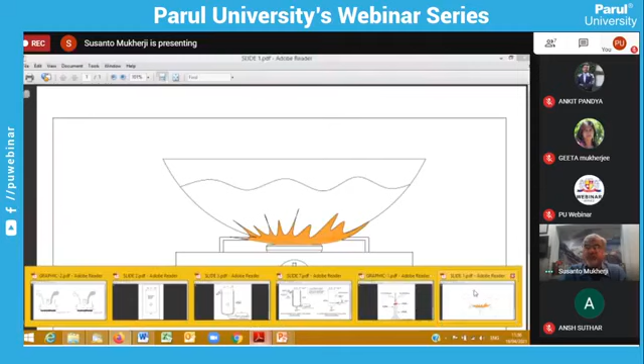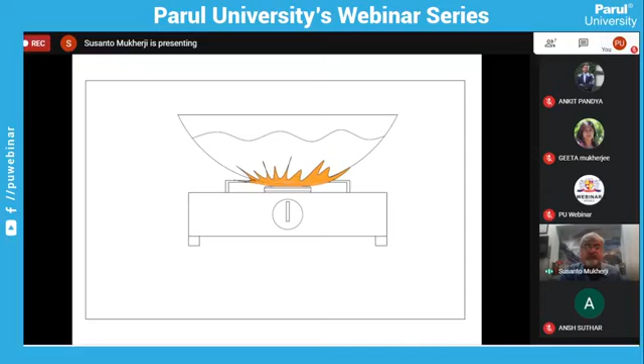Suppose we would like to make sugar syrup at home, chasni as you call it in Gujarati. What do we do? We actually take a pan, put sugar and water inside, put it onto the gas stove and heat it till we get the required consistency, right? Now in industries like the sugar industry, Baroda Dairy, the food industry, which is also a part of the process industry, this same heating would be required, and it would be required to be done 1,000 times more, or maybe more than 1,000 times more. So now suppose we try to heat this in the same way as we do it at home.

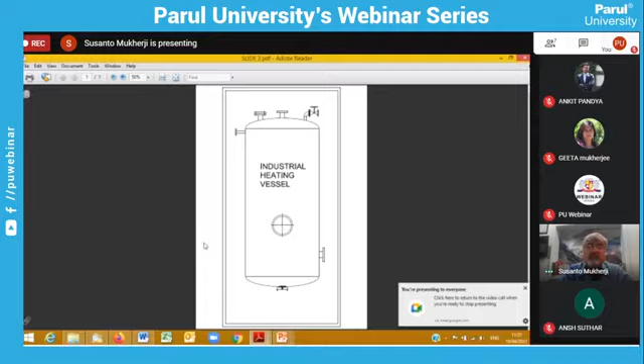By putting a gas stove, see what would it look like. This is the kind of size of the vessel that is used for heating the process fluid inside. And suppose you want to heat it with a gas stove as seen here, this would be the situation, which is actually just not possible, right?

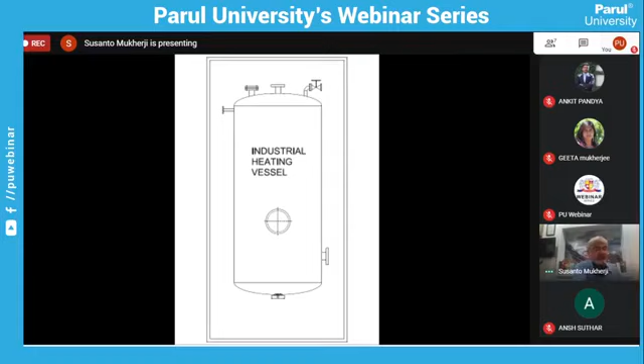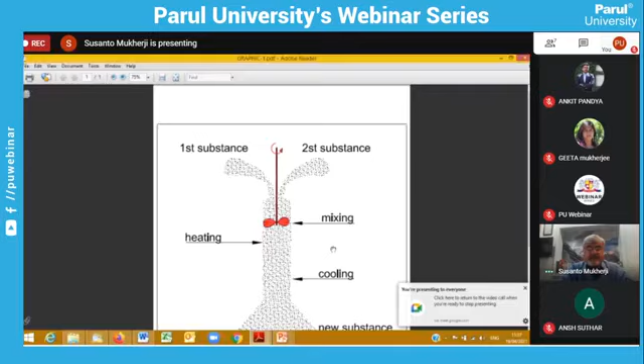So we will try to understand how the heating is done in the industry. Before that, I would like to discuss with you this term we are using, process industry. So what is a process industry? To understand that, let us see this figure.

A process industry in general is defined as an industry where two or more different substances are mixed together, and then heat is provided, that is heating is done, or cooling is done if the process is exothermic, and what we get is a completely new substance, a third substance comes out. Now the sequence of mixing, the time of mixing, the heating time, the cooling time, the sequence of heating and cooling might be different based on the substance that we require. So a process in the process industry would involve mixing two substances, making it go through a process of heating, cooling, etc., and getting a third substance.

As we discussed about the sugar syrup, it is also a process in the process industry. Sugar and water is mixed, put inside a container, and it is heated to get the required consistency.

Similarly, if we look at another process we might have learned in chemistry: calcium carbonate plus hydrochloric acid gives calcium chloride plus water plus CO2. The equation would be as simple as CaCO3 plus 2HCl equals CaCl2 plus H2O plus CO2. Let's not get into those complications.

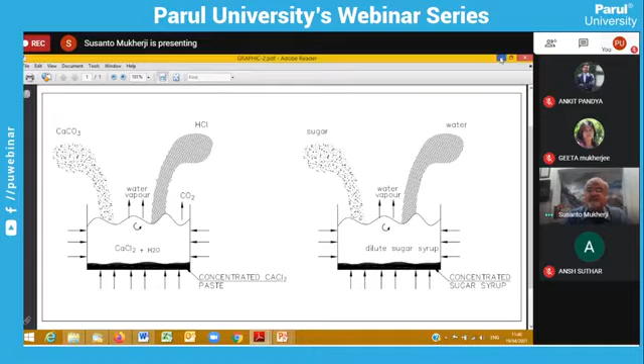Both these examples, the sugar syrup as well as mixing of limestone with hydrochloric acid, are examples of heating used in the process industry. Now, how is this heating done in the process industry? As we saw, we cannot do it by putting a gas stove under a vessel because the vessels are very big. So how do we do it in a process industry?

This is the kind of vessel that is used. Now, what we are trying to understand, as I said in the beginning, is the indirect steam heating. We will do the indirect steam heating first, and then we will go to the direct steam heating.

A jacket has about, say, 50 mm or 100 mm gap between the main vessel wall and the jacket wall. Steam is provided into this jacket, and this steam gives its heat from the jacket to the inside, and inside the vessel there is this fluid.

So if you want to make sugar syrup, Sugam Dairy wants to make sugar syrup, they will put sugar and water inside here. They will supply heat through the steam, through the jacketed vessel, and this will start boiling, and therefore you will get a concentrated sugar syrup. The same happens with limestone powder and hydrochloric acid, and heat is provided by steam through this jacket.

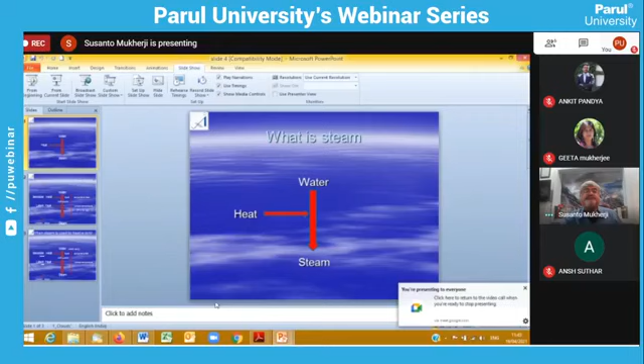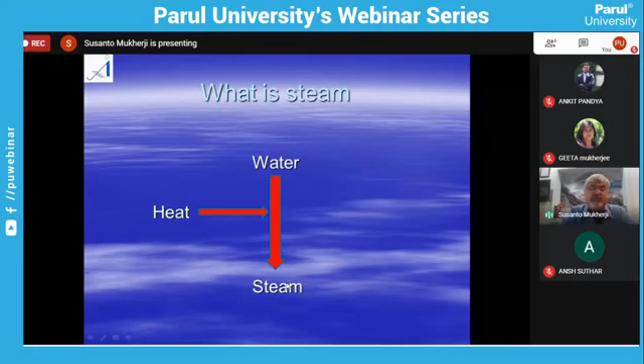For this, we'll try to understand the characteristics of water. Now, what is steam? Steam is nothing but the vapor stage or the gaseous stage of water. Now, if you have water and you supply heat to water, what you get is steam, in very simple words. Now let us understand this in a little more detail.

This heat that is added to water in the liquid state is called the sensible heat. It is named the sensible heat for the purpose of understanding. After this sensible heat keeps continuing to heat the water, temperature rises and reaches the boiling point, which is also called the saturation point. You continue to supply heat, and what happens is the temperature remains constant, but heat keeps getting added to water, and the water starts changing its state.

It starts changing its state from water to steam. This heat that is supplied at constant temperature to water to change its state is called the latent heat. I'm quite sure you all have studied all this. The latent heat is used for energizing the molecules to break it apart and change the state of water to steam. This happens at constant temperature.

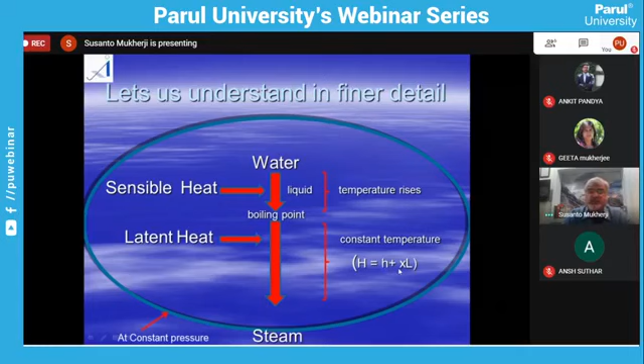Now what happens if we reverse the process? Once the steam is taken and made to get in contact with a cooler surface, what happens? Immediately the steam will start giving away its latent heat first. Once it reaches the saturation point, that is, all the latent heat is given away, it will turn into water, and there still will be sensible heat in the water, and the sensible heat will also be given away.

But what we need to understand here is latent heat is given away very easily by steam. That is why you see the words udaar and kanjoos here. What it means is latent heat is very easily given away, very fast given away, that is, it is given away at a very fast rate.

And sensible heat is difficult to give away. So once you have hot water, you will have a very slow rate of heat transfer. So whatever heat is required for heating the cold fluid will be done at a lower rate if you have hot water and you are transferring sensible heat. As long as steam is there and giving away its latent heat, the latent heat is given away fast, and therefore a faster rate of heating takes place.

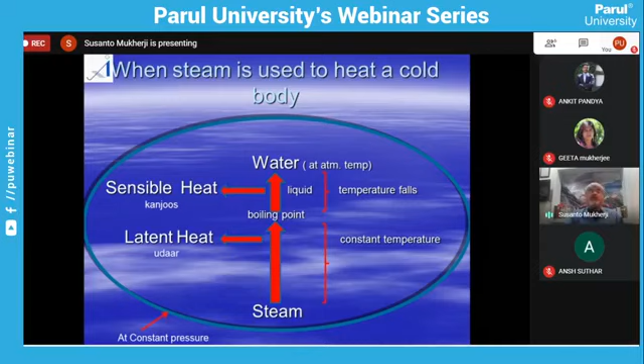Therefore, if you go back to the fundamental of the jacketed vessel, you will now realize that steam is used for heating because there is latent heat inside steam, and latent heat is given away fast. Then the water is removed because sensible heat gives away slowly.

Now most of the industries work on the logic of rate of production. Rate of production would mean how fast production can take place. Therefore, every industry is more or less interested in having the latent heat so that heating takes place fast, and removing the water. The steam forms water after the latent heat is given away, and removing that water as soon as possible because sensible heat takes time to get transferred.

Now let us get back to the slide of the jacketed vessel again to understand it better. As we saw before, this is the jacketed vessel.

Therefore, indirect heating in industry takes place in a way that steam is supplied into the jacket. There is the process fluid inside. This is the cold fluid as we talked, and this is the hot fluid. So as soon as steam comes in contact with this surface, which is cold due to the cold fluid inside, it starts giving away its latent heat. This is called the jacket area. So from the jacket area, the steam starts giving away its latent heat.

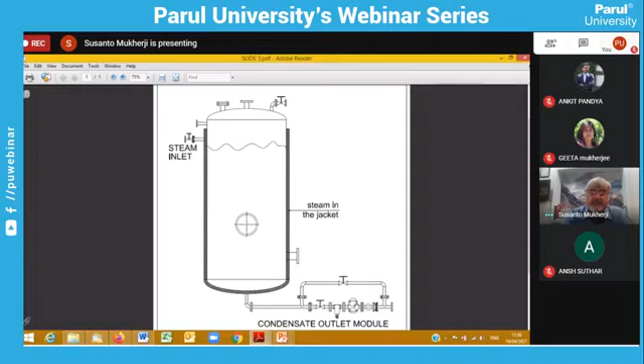This is called the steam trap. Now a steam trap is an equipment which allows water to flow out but does not allow steam to go out. How this works is a different subject altogether; if the opportunity arises, we'll discuss it sometime. But at this juncture, let us understand that a steam trap is a kind of equipment which will stop steam from going out, so that all the steam, until and unless it has given away its latent heat totally to the fluid for heating it, is not allowed to go out, but it will allow water to go out. So as soon as water is formed inside, it will get removed through this steam trap module.

Everything else you see here, like this strainer, these valves, this double window sight glass, are all to complement the steam trap. The strainer ensures the steam trap doesn't get choked, and the double window sight glass lets you see whether water is being removed or whether there is a leak in the steam trap and you are losing steam, etc.

So this is how indirect heating takes place in the process industry. Indirect heating means the steam does not come in direct contact with the process fluid, so it's indirect. The steam gives away its latent heat, and as soon as the water with the sensible heat is formed, it is removed.

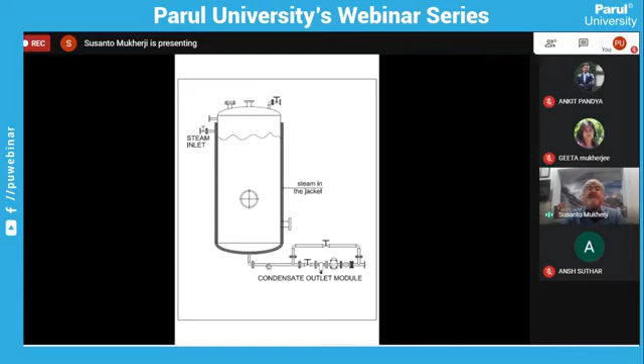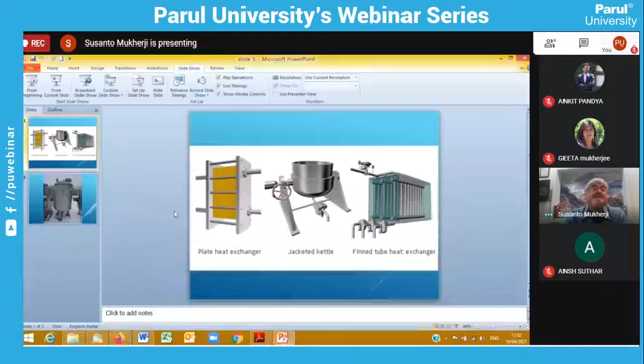Let us see a few more equipments used for this kind of indirect heating. You have, say, plate heat exchangers here. Plate heat exchangers would mean different plates put together with a slight gap between the two, then bundled up using these end plates. Steam passes through one path and the process fluid passes through the other gap.

So side by side you have steam in one plate and the process fluid in the next, steam and process fluid, and this is how the process fluid is heated using steam without the steam getting in touch with the process fluid. These are plate heat exchangers, and the main advantage is that you have a bigger area of heat transfer than the jacketed vessel. There are many plates, so all these areas together give you a bigger area where steam can keep giving away its heat.

Similarly, you have kettles like this. The sugar syrup in the food industries is made in these kinds of kettles. Process fluid is poured inside, steam is used in the jacket, and this is the steam trap. Once the sugar syrup is achieved, you just use this handle to convert or tilt it and remove the sugar syrup.

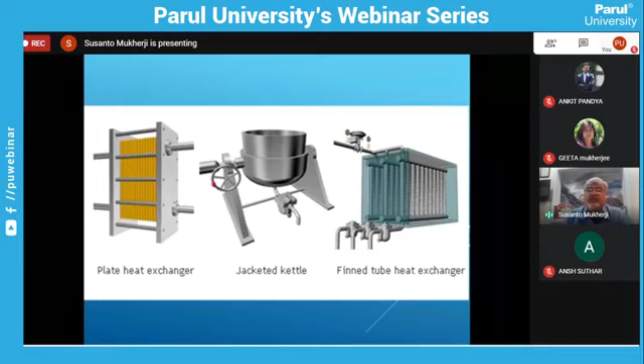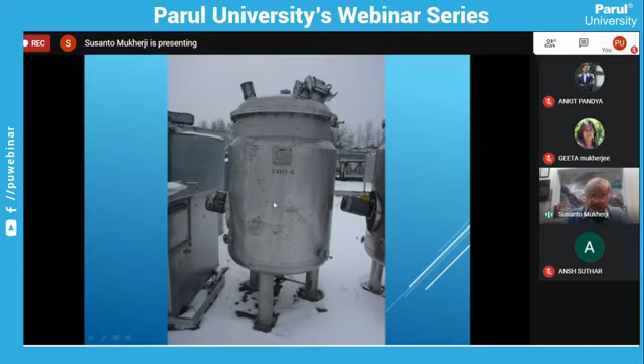You have fin tube heat exchangers. Fin tube heat exchangers are tubes put inside which have fins to increase the area of heat transfer. Steam passes through the fin tubes and the process fluid passes from the side. All these are vessels, like this jacketed vessel, the drawing of which we saw. This is the jacket, and this is the main vessel where the fluid is poured in. All these vessels are used for indirect steam heating because the steam does not get in touch with the process fluid.

Now in indirect steam heating, we need to understand one fact: once the condensate is formed after steam gives away its latent heat, this condensate needs to be removed, and is either wasted along with the sensible heat, or arrangements have to be made for returning this hot condensate back to the boiler feed water tank so you can recover the sensible heat in the water and not waste money, because heat is equivalent to money.

This is how basically indirect heating takes place in an industry.

Okay, now that we have understood what is indirect heating, let us now approach how direct heating takes place in the industry. At the end of the session, we will have a comparison of direct steam heating and indirect steam heating to see the advantages of both and where each can be used.

Okay, so that was all about indirect steam heating. Now let us understand what is direct steam heating. Direct steam heating, as the name suggests, is the kind of heating where steam comes in direct contact with the process fluid.

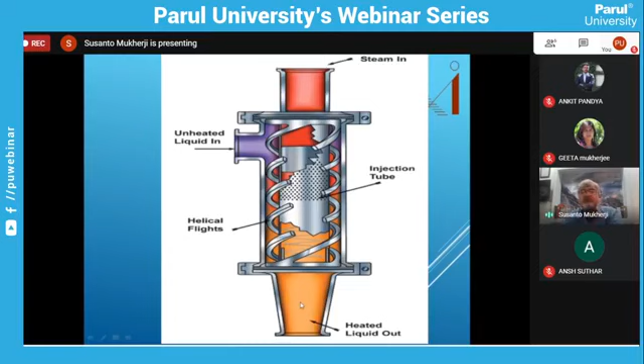Similarly, let us understand with the help of graphics. Suppose we want hot water. We can heat it by putting steam inside the water. Let us see how that happens.

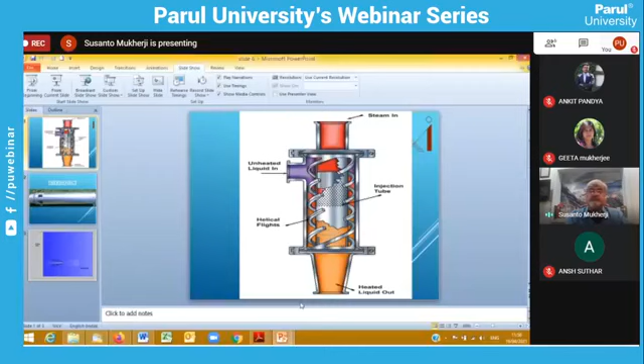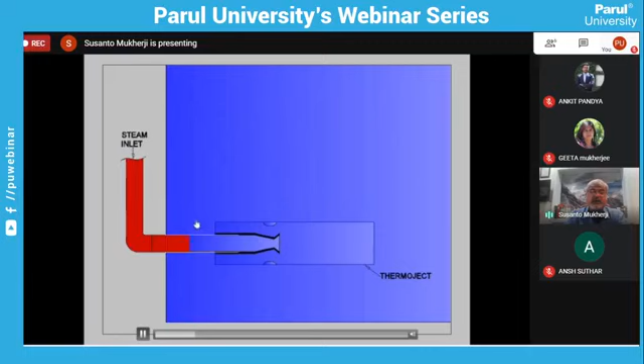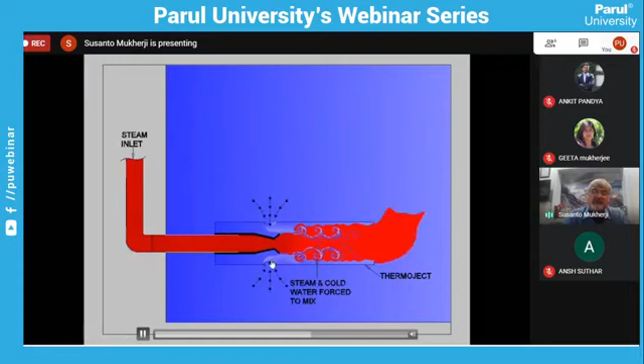You have steam coming in here from the inlet, into an equipment called a thermoject or steam injector. As it goes inside the injector, it pushes the fluid, so other fluid comes in from the side. The water gets sucked in from the side and mixes in here. Hot fluid goes up, cold fluid comes down, the process continues, and slowly the whole water gets heated. This is a kind of steam injector.

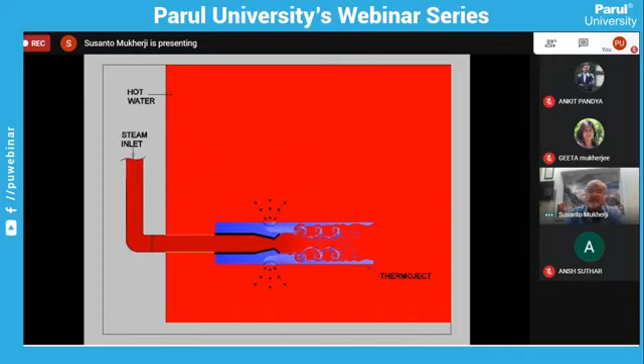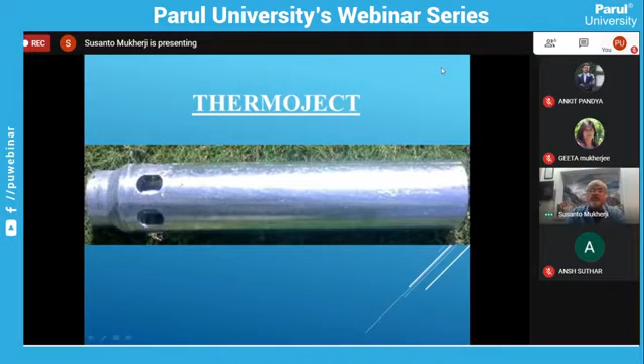Many equipments like this are available. The steam injector looks something like this, where steam comes in from here, cold water gets sucked from here, everything mixes inside, and hot water comes out from here. You have similar equipment called sparge pipes, where you can dip a pipe. Each has its advantages and disadvantages, which is another subject we can discuss later.

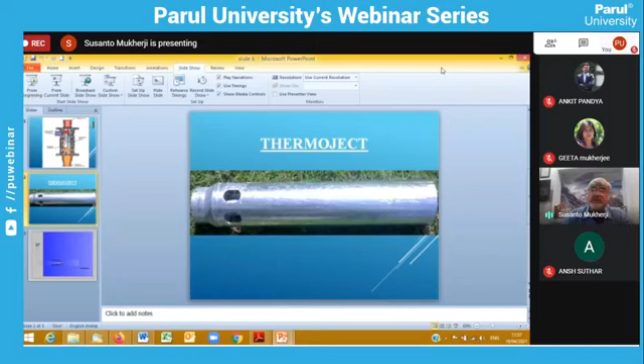But this is basically the concept of direct steam heating, where steam directly comes in contact with the process fluid and heats it. Now that brings forth a very important point: this kind of direct steam heating is only possible where the process permits the mixing of steam into the process.

You cannot have something which you want to concentrate by heating, like calcium carbonate and hydrochloric acid forming CaCl2 and water, which you want to heat and evaporate. If you add direct steam heating, you will actually add water into it, since the steam gives away its latent heat and becomes water inside. So it won't get concentrated, it will get diluted. Such a process won't allow direct steam heating.

We will understand at the end of the session that direct steam heating is advantageous. It saves money, it saves energy, but the limitation is you will have to use direct steam heating only where the process permits the mixing of steam with the process fluid.

One such major process used in the industry, let me discuss with you so the concept is more clear. Mainly in pharmaceuticals, there are certain concentration and mixing processes required along with heating, where very gradual heating is mandatory to get the finished product of the required quality.

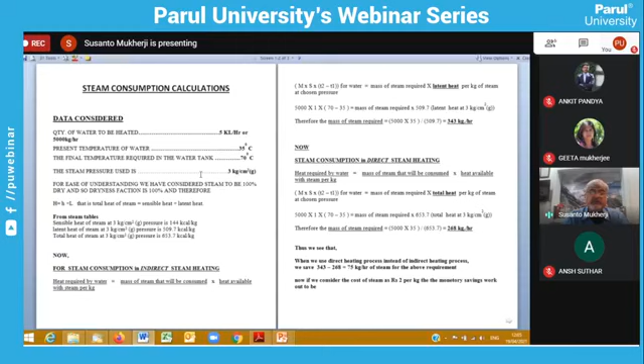How do we put this into a view full screen? Okay, I'll just try to see if I can increase the size. How do we increase the size? Let us see, put it this way.

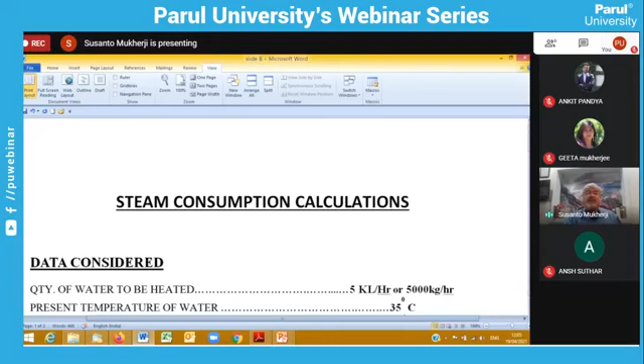Okay, so let us now try to understand steam consumption calculations. We'll first try to understand the steam consumption if we use indirect steam heating, like suppose we take the example of hot water generation and we put it inside a jacketed vessel. What happens to the consumption of steam?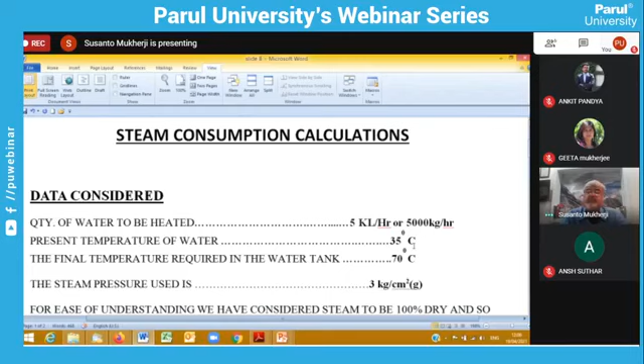Now the data considered: the quantity of water to be heated is about 5 kl per hour or 5000 kgs per hour or 5000 liters per hour. Specific density of water is 1, so let us consider 5000 kgs per hour. The water needs to be heated from 35 degrees to 70 degrees, and the steam pressure used is 3 kg per cm square gauge. For ease of understanding, we have considered steam to be 100% dry, so dryness fraction is 100% or 1.

Therefore, we have capital H is equal to H plus XL.

X is 1, so we have considered H is equal to H plus L, that is the total heat of steam is equal to sensible heat plus latent heat.

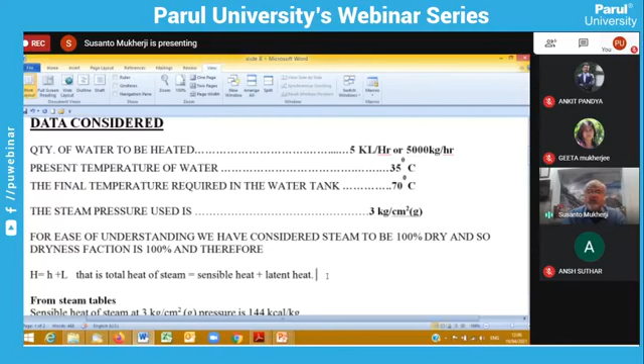Now all of you, I am quite sure, know about steam tables. For the given pressure, you get these values from the steam table. The sensible heat of steam at 3 kg per cm square gauge pressure is 144 kilocalorie per kg. The latent heat is 509 kilocalorie per kg, and therefore the total heat is the addition of both, which is 653.7 kilocalorie per kg. Now you have to understand, in steam tables the values are given as kilocalorie per kg. So if 1 kg steam is used, it can give away latent heat of 509.7 kilocalories at 3 kg per cm square pressure. I'm quite sure this concept is clear with you.

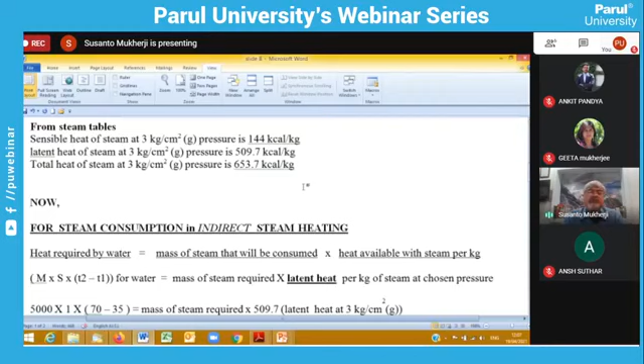Now all of us have heard about the equation m S T2 minus T1, that is, heat required would be mass into specific heat into difference of temperature. Now if we want to find out the steam consumption, let us consider the indirect steam heating process, that is, only latent heat of steam is used. Therefore, heat required by water would be mass into specific heat of water into difference of temperature required, and this would be equal to the heat given by steam. Now in case of indirect heating, it would be mass of steam that would be required into the latent heat of steam per kg.

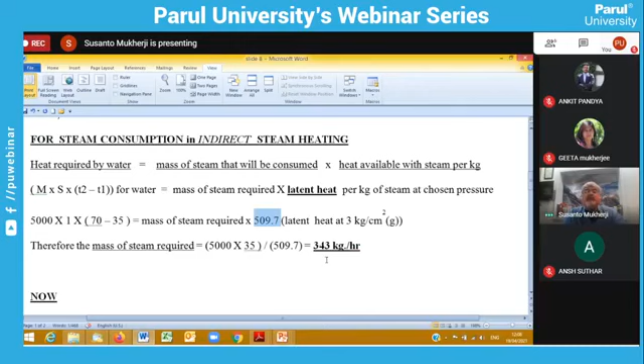So therefore, what we have is 5000 kgs per hour. So 5000 into 1 is the specific heat of water, which is 1 kilocalorie per kg of water required to raise the temperature by 1 degree centigrade. So it is 5000 into 1 into, we needed to heat the water from 35 degrees to 70 degrees, so 70 minus 35. This would be equal to the mass of steam required into the latent heat at 3 kg per cm square, that is 509.7 kilocalories per kg. Therefore, the mass of the steam required would be this divided by this, so it would be 5000 into 35 divided by 509.7, which is equal to 343 kgs per hour.

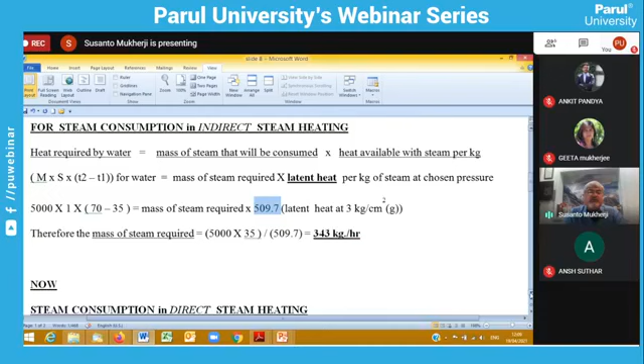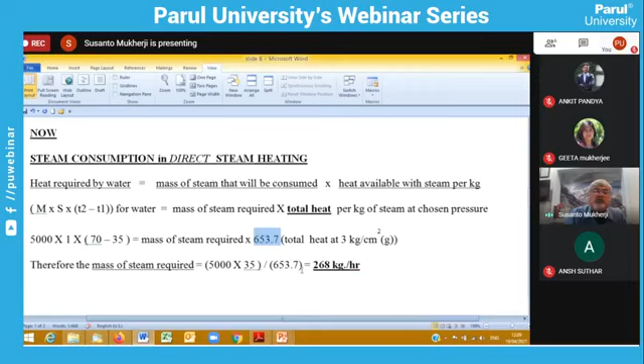So as you saw above, the steam required in indirect steam heating was 343 kgs per hour, whereas if I used direct steam heating for achieving the same temperature of water for the same quantity, I used only 268 kgs per hour, which would mean 75 kgs per hour of steam would be saved. We save 75 kgs per hour of steam for the above requirement.

Per hour is important. Therefore, if we start calculating, the industrial price of steam is about 3 rupees per kg. I have considered rupees 2 to be on a more conservative side. So if you see and relate it with money, what you'll end up saving is 75 into 2, that is rupees 150 per hour. Or you'll end up saving 75 into 2 into 24, that is rupees 3600 per day. And 75 into 2 into 24 into 365 days would mean 1,31,400 per year, which is a substantial amount.

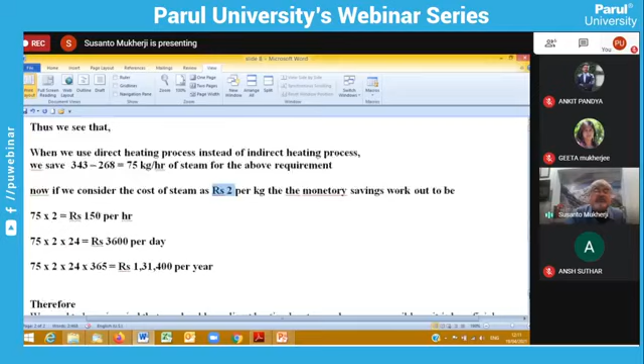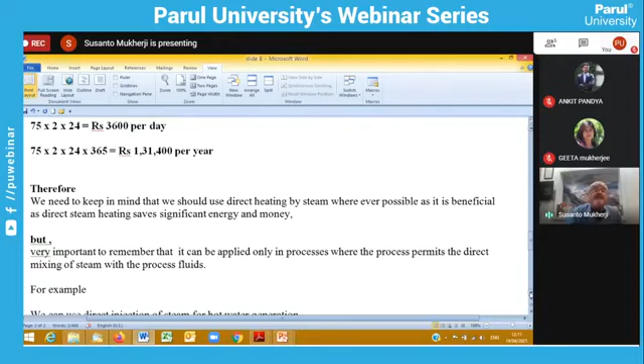Therefore, we need to keep in mind that we should use direct heating by steam wherever possible, as it is beneficial, as direct steam heating saves significant energy and money. But it is very important to remember that it can be applied only in processes where the process permits the direct mixing of steam with the process fluids.

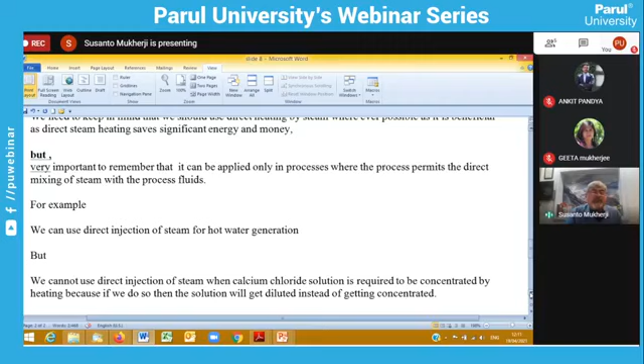For example, we can use direct injection of steam for hot water generation. But we cannot use direct injection of steam when calcium chloride solution is required to be concentrated by heating, because if we do so, instead of getting concentrated, it would actually get diluted, and our whole aim is defeated. So now we know that today steam is the most used medium of heating in the process industry, and we have two ways that it is heated.

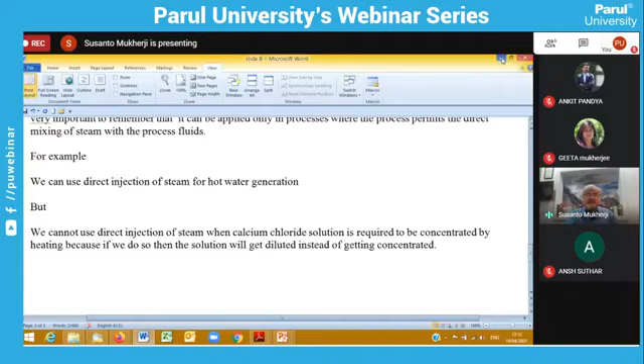The indirect way is where you have the jacketed vessel being used, and steam heats the process fluid without getting in touch with the process fluid. That's the indirect way of heating. The second way is direct injection or direct steam heating, where the steam is directly put into and mixed with the process fluid, and it is heated.

I hope this makes the basic concept of how steam is used for heating in the industry a little more clear to all of you. We can have a detailed discussion in some other session, but today my aim was to introduce you to the environment of heating in the process industry using steam, and the two ways are the indirect way and the direct way of heating.

I hope this, to a good extent, introduced you to the concept, and I hope you have understood it well. With this, I would like to end my session. I wish all of you to stay happy, stay safe, and stay blessed forever.

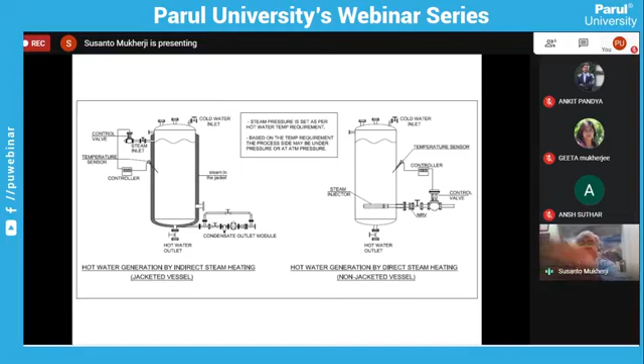As we saw in the calculation, to heat this water by directly injecting steam into the water, you use a lesser quantity of steam to heat the same quantity of water to the same required temperature than you would by using indirect steam heating. You use lesser steam here because you are using the sensible heat plus the latent heat, the total heat, whereas in indirect heating you are using only the latent heat. So you can use steam to heat water, using only the latent heat if you heat it by the indirect process, and using the total heat, sensible as well as latent, if you use direct steam injection.